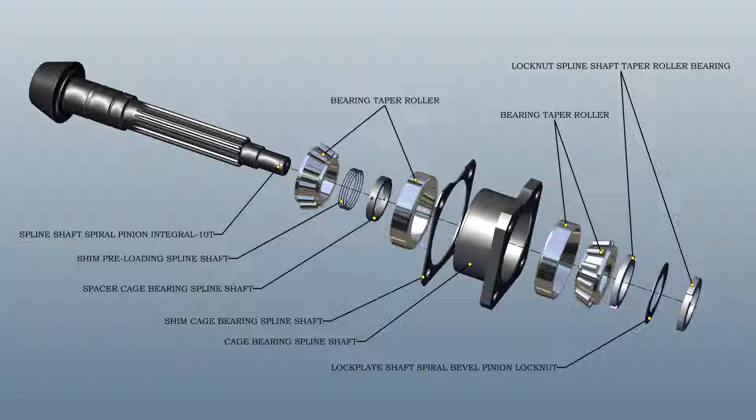Assembly. Insert taper roller bearing inner race on spline shaft. Insert shims and spacer.

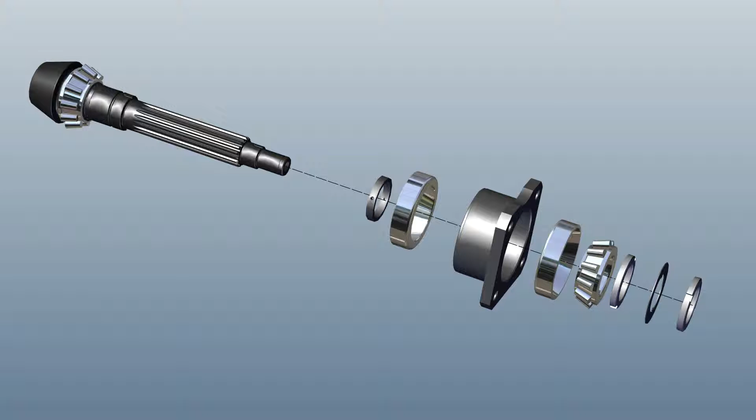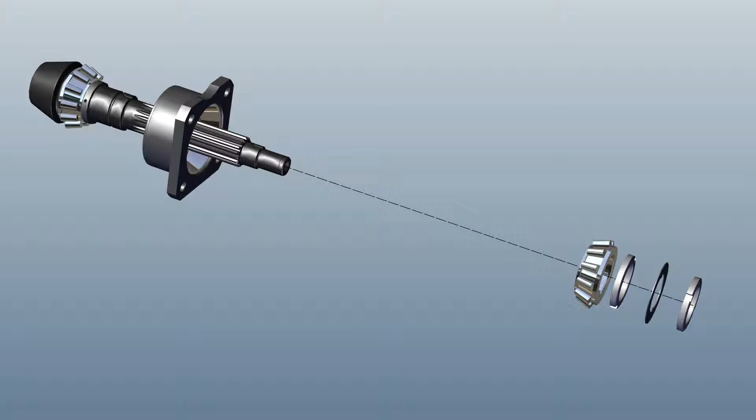Insert both outer races of the taper bearing into the cage. Insert the cage on the spline shaft. Insert the taper roller bearing. Note: heat the bearing for 15 minutes in an oven at 90 degrees before installation.

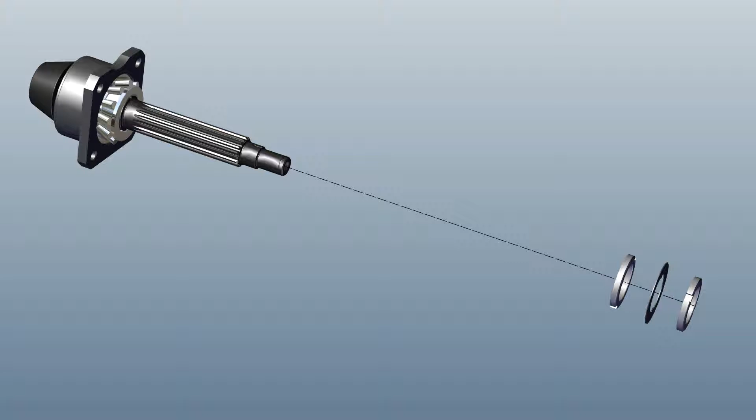Tighten the lock nut with 217 Newton-meter torque. Insert spacer. Tighten the lock nut with 190 Newton-meter torque.

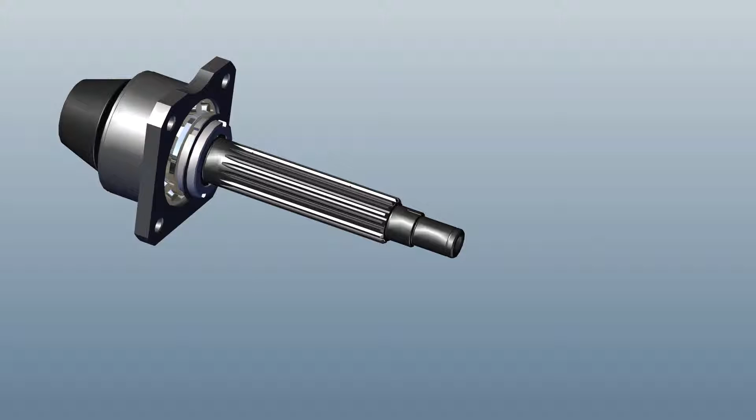Preload measurement of taper roller bearing. Hold the spline shaft assembly into a bench vise in horizontal condition. Tie a string on the cage with a spring balance meter.

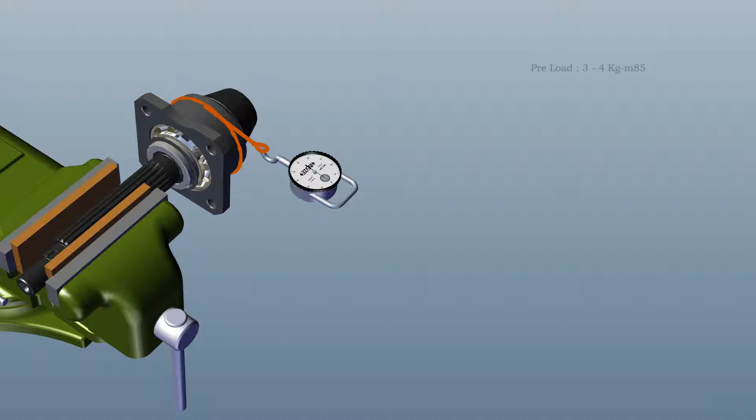Pull the spring balance so that the cage will also rotate. Measure the readings; preload should be 3 to 4 kg-m. If the preload is not okay, remove the spline shaft assembly again.

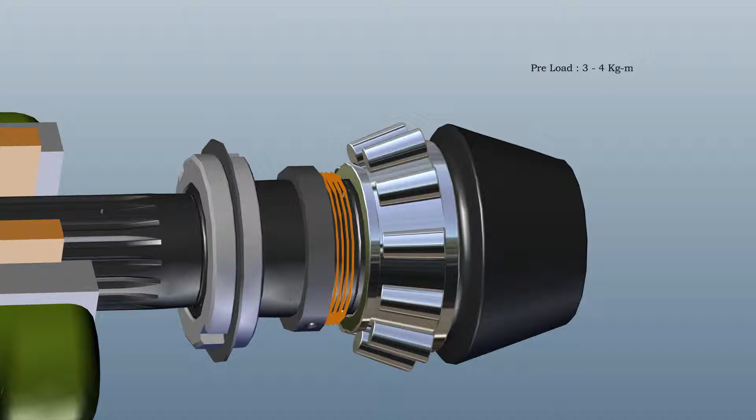Add or delete shims, assembled in between the taper roller bearing. Complete the assembly and measure the preload again until the desired value is reached.

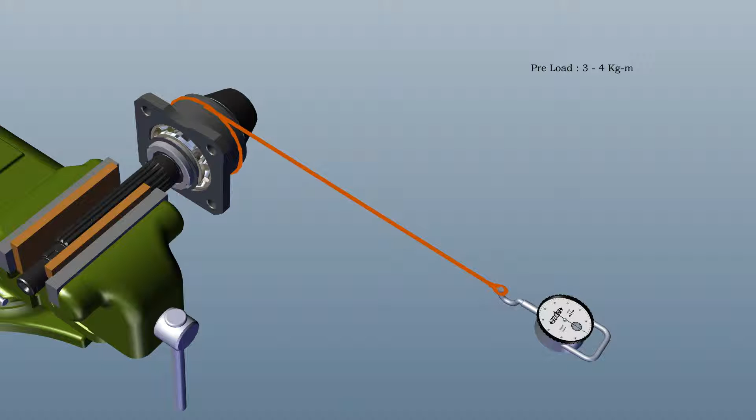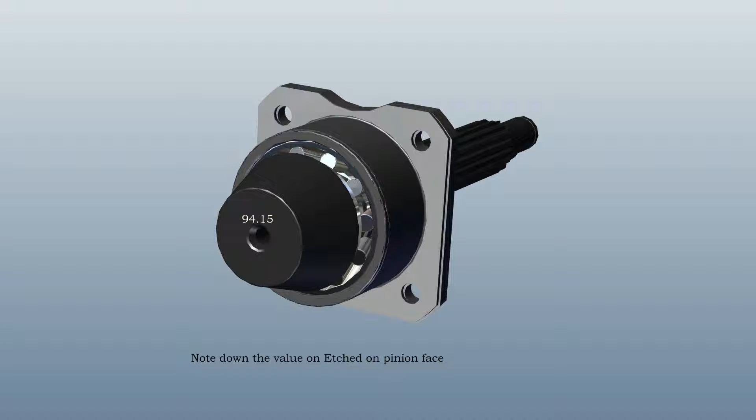Cone center distance measurement. Insert shims on the cage. Note down the punch value on the face of the pinion. For example, 94.15. Note: this value indicates the distance from the spline shaft face to the crown center.

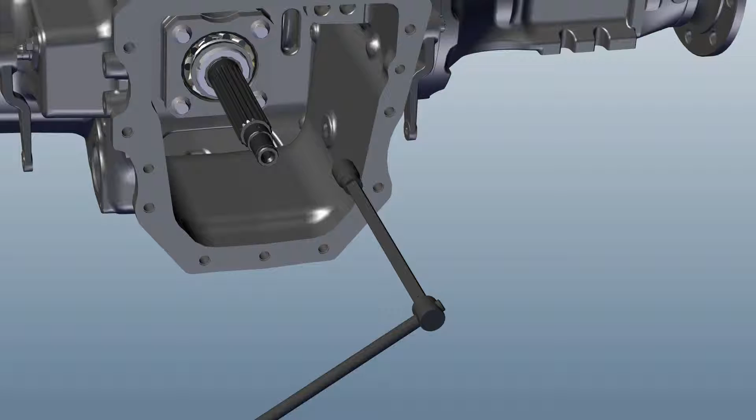Assemble the whole assembly into the rear housing. Tighten 4 number M12 bolts with 124 Newton-meter torque.

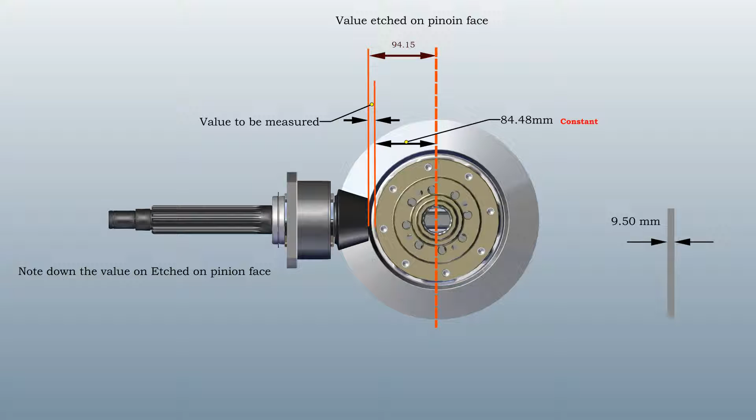Please refer carefully to the picture shown on screen. Distance from spline shaft face to crown center, that is 94.15, etched on the pinion face. Distance between the differential cage and crown center is constant, that is...

84.48. Subtract: 94.15 minus 84.48 is equal to 9.67 millimeters.

CCD tool thickness is 9.5 millimeters, a special tool given with the tool kit. Subtract 9.67 minus 9.5 is equal to 0.17 millimeters.

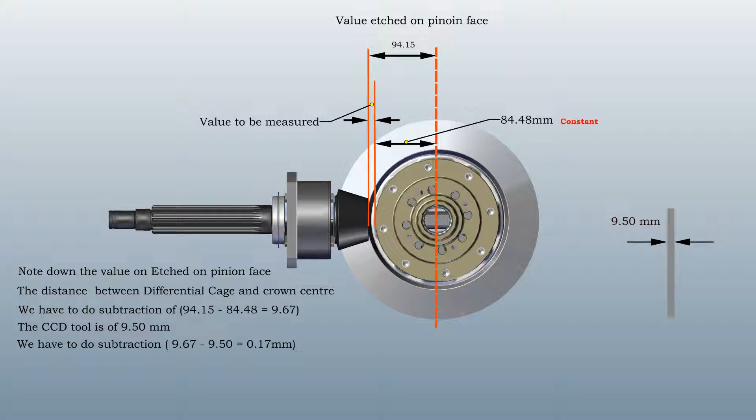This gives the feeler gauge selection. Insert the CCD tool in between the pinion and differential cage. Insert the feeler gauge as per the value received, that is 0.17 millimeters.

If the feeler gauge goes loose, then remove shims; or if the feeler gauge goes tight, then add shims as shown.

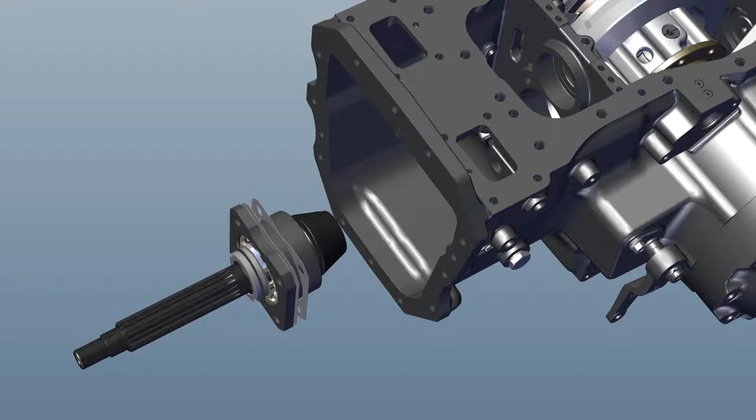Ensure the CCD tool and feeler gauge go in properly.

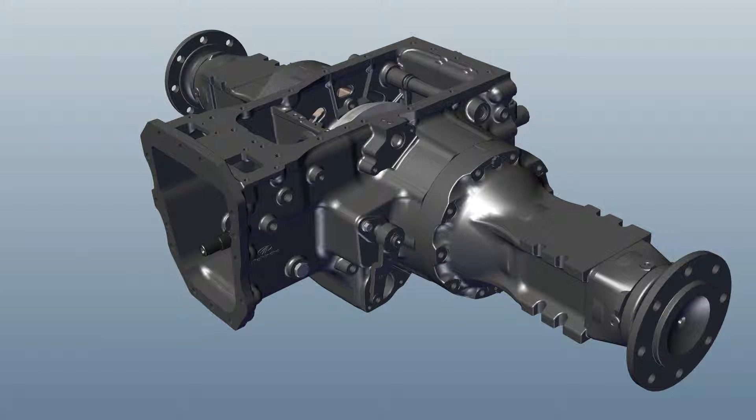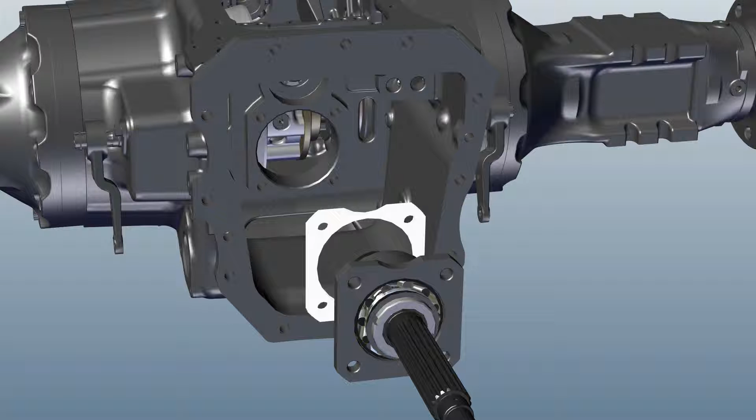Stack height of the bottom shaft. Note: this setting should be done after CCD shims selection. Remove the spline shaft assembly and ensure the finalized CCD shims are on the cage.

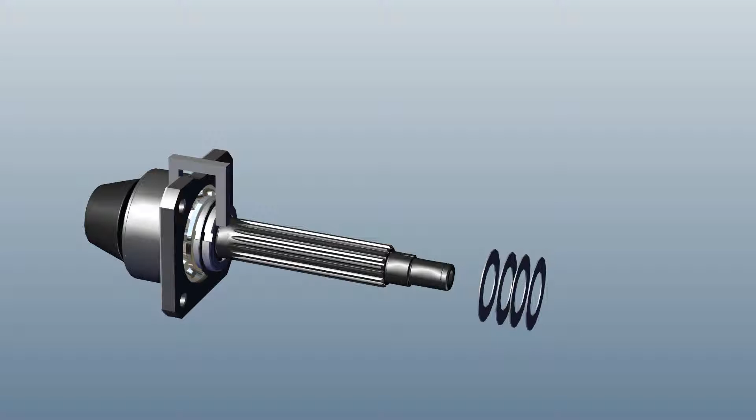Take the special tool MST TN D104. Insert shims in the spline shaft. Use the special tool to check the correct stack height.

Add or remove the shims to maintain the stack height of 37.50 millimeters.

Assemble the spline shaft assembly into the rear housing. Tighten 4 number M10 bolts.